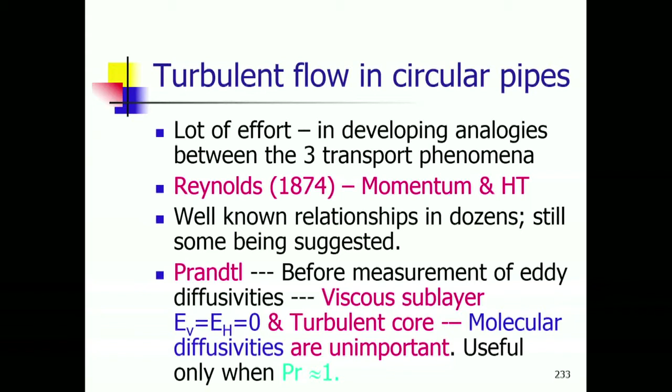In that viscous sublayer, Prandtl proposed that eddy transfer does not play a part, and he said EV and EH must both equal 0. And in the turbulent core, he proposed that the molecular transport is unimportant. It turns out this picture holds good when Prandtl number is close to 1, which means basically situations like gases. When the Prandtl number or Schmidt number becomes large, we will encounter difficulties. So, this is the first part that I wanted to tell you about.

Colburn, again a prominent chemical engineer, made a modification of Reynolds analogy which brought one of the surprises. His modification could explain data even when Prandtl number was large, and his equation appears this way. This is Stanton number, capital S, small t. Stanton number for heat transfer on average is the average heat transfer coefficient, H average, divided by Cp ux bar rho or Cp G, ux bar rho being the mass velocity.

And this is equal to 1 by 2 the Fanning friction factor F by Prandtl to the power 2 by 3. So, the Colburn analogy amounted to this: Stanton H average, which is nothing but the ratio of the Nusselt to the product of Reynolds and Prandtl, times Prandtl to the power 2 by 3, is H average by Cp G Prandtl to the power 2 by 3, equal to F by 2. And we know the Fanning friction factor is uniquely a function of Reynolds number, some function psi of Re; that entire graph of universal friction factor is represented by this relation.

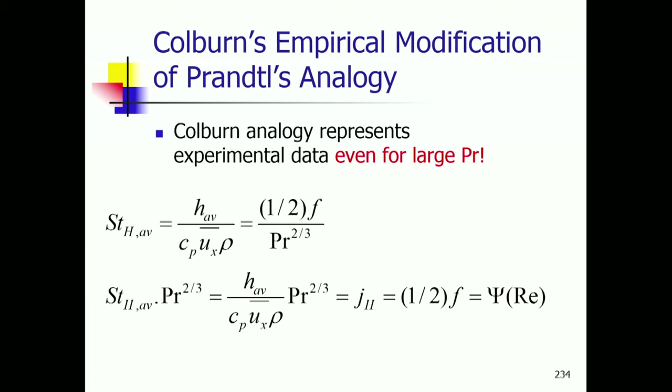Later, Chilton made further improvement. The Chilton-Colburn analogy brought in an analogy for mass transfer, and it appears like this. Analogous to Stanton H average, we have Stanton D average. Analogous to Prandtl, we have Schmidt to the power 2 by 3, and Stanton number is F average by C ux bar, where C is the concentration, moles per volume. This mass transfer group is called J sub D and is again equal to F by 2, the same function of Reynolds number psi of Re. This agrees with experimental data when Schmidt number is not too large.

We need obviously some correlations in order to be able to predict the Nusselt or Sherwood number from Stanton numbers. So, Stanton H average and Stanton D average for heat transfer and mass transfer, Stanton numbers are given by the same form as we expected earlier, but this is based on experimental data. Obviously, in the Stanton H we will have Prandtl, in Stanton D we will have Schmidt. It is not very difficult to remember, even though I do not expect you to remember this.

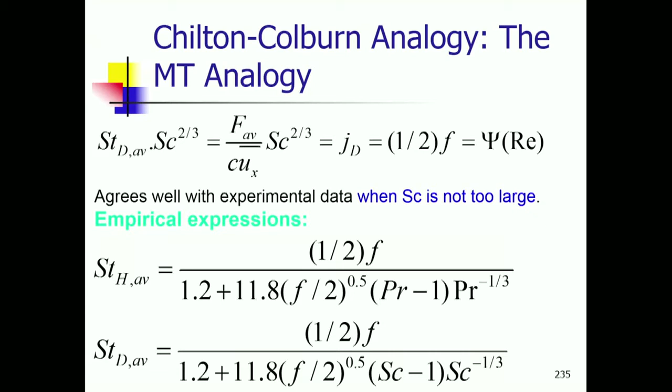F by 2 over 1.2 plus 11.8 (F by 2) to the power 0.5, and then Prandtl minus 1, Prandtl to the power minus 1 by 3; Schmidt minus 1, Schmidt to the power minus 1 by 3, rest is same. Okay. So, this pair of correlations works well in getting us the data on heat transfer and mass transfer. You are seeing the correlations, experimental correlations appearing in form of dimensionless groups or dimensionless numbers.

I had been talking about Buckingham pi theorem, we will come to that shortly. I have also been talking about representation of data in a compact fashion or in some kind of universal correlations, reduction in number of parameters and independent variables. Okay. I want you to have a glimpse of it once again today, but before that

let me now explain to you that we do not expect any analogy between heat, mass and momentum transfer, nothing to salvage, if the Schmidt number is large or Ed by D and Eh by alpha do not equal Ev by nu. Main point is when Schmidt number is large, very large, we do not expect analogies. It is another viewpoint.

I have come across later papers which question the very basis of analogies. Particularly important papers are from Churchill's group. We might have an opportunity to talk about those views later. But for the time being and at the graduate level, it is sufficient to note that analogies can be useful, but should not be treated as sacrosanct.

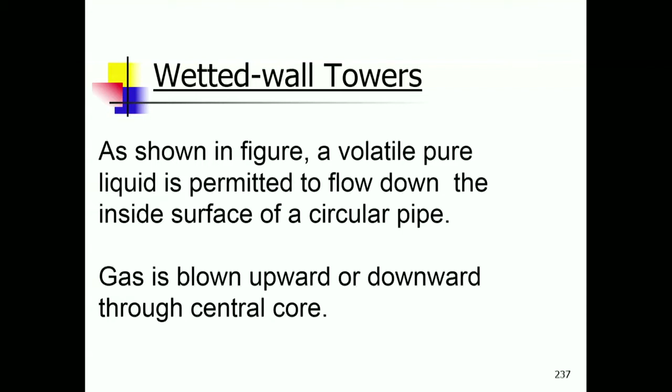Although I had described wetted wall towers to you in words very briefly, I will show you a sketch and it will give an idea how an experimental wetted wall tower would appear. Here is a pipe which is narrowed down here and renders liquid in this reservoir to flow down along the inside of this pipe. So, you have this as the test section. This portion is the feed reservoir, the liquid which is fed guided by this tapered portion on the inside of the pipe, and this is the length of test section.

The liquid film stays in contact with gas or vapor here and then gets collected here and removed. The gas is moving from bottom to top in counter current fashion here. Since we know the inner diameter of this pipe and we would be able to measure or estimate the liquid film thickness, we have a well defined gas liquid interfacial area in this test section.

So, if one were to measure the difference in the vapor concentration, highest here in the outgoing gas, and maybe 0 or whatever inlet concentration, and we know the gas flow rate, we would know the molar flow rate of the vapor which has been acquired by evaporation or vaporization across that interface of known area. Once we know the total molar flow rate of the vapor picked up divided by the area of this test section, we know the flux, and since we know the partial pressure which will be also the vapor pressure at the surface and the average pressure in the bulk, driving force would be known. So, the mass transfer coefficient could be estimated.

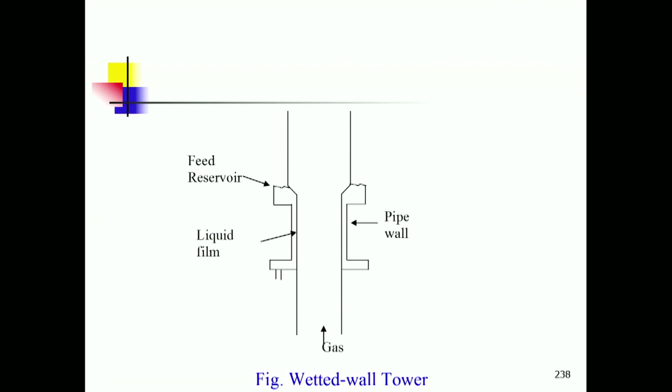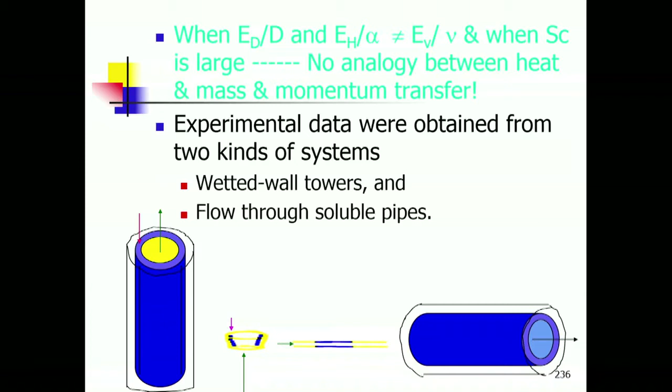By measuring the benzoic acid concentration in the outlet and subtracting the inlet concentration, you get the difference in concentration, multiplied by liquid flow rate, you get molar flow rate like earlier. Divide by the area of this test section and you get the mass transfer coefficient. The concentration difference here will be the solubility at the interface minus the mean concentration in the bulk. So, once again you can get mass transfer coefficient, and with this now you can change the viscosity of liquid, you can choose the solute to be of large molecular weight, so low solubility, etc.

And it was done by Linton and Sherwood, and the range of Schmidt numbers was extended from 0.6 to 2.5 of Sherwood and Gilliland to about 3000. Now, that is a large value. Their correlation appeared finally in this form. This is important for us to remember. Sherwood average is 0.023, Reynolds to the power 0.83, Schmidt to the power 1/3.

Okay. Take a few seconds to watch this correlation, and before I show you the next slide, I have something to tell you about fluid mechanics. So, Sherwood average is 0.023, Reynolds to the power 0.83, Schmidt to the power 1/3. If we were to correlate data only for gases, then the power on Schmidt would be better as 0.44. This probably happens because the ripples we had spoken about at the interface might influence the gas liquid mass transfer.

Okay, now comes my question. From whatever you have known of fluid mechanics so far, and considering that pipelines and flows through pipes are ubiquitous, we come across these everywhere, not just in a chemical plant or refineries, but in transport of crude and other petroleum products, which stretch over thousands of kilometers at times. It is natural to anticipate that a chemical engineer is crudely measured in his abilities in terms of his ability to calculate pressure drop.

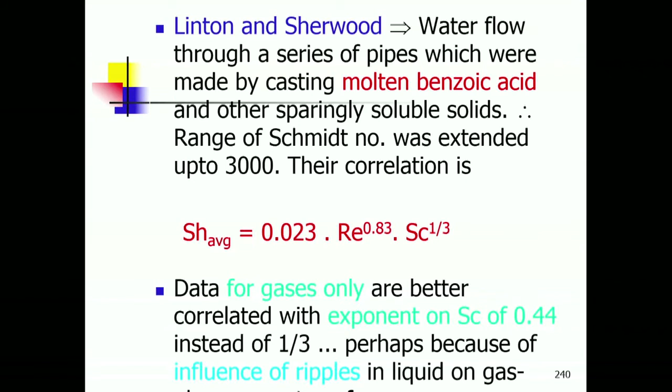Okay. Now, rewrite this as 0.023 Reynolds to the power minus 0.2 into Reynolds power 1.03. This is same as Reynolds to the power 0.83, and then we have Schmidt to the power 1/3 written as Schmidt by Schmidt to the power 2/3. Okay. Now, transpose these terms. Take this whole thing over here. So, it becomes Schmidt to the power 2/3 by Schmidt. This comes as Reynolds to the power 1.03. This is Sherwood average as we had.

What is left on this side then? Right hand side is 0.023 Re to the power minus 0.2. And that is what I want you to know is F/2, or F is 0.046 Reynolds to the power minus 0.2. Right? Now, observe the left hand side. You see this is Sherwood average by Re to the power 1.03 Schmidt. This is roughly Re. Sherwood average by Re Sc is the Stanton D. Okay. So, you see that Stanton D times Schmidt to the power 2/3, or JD, is equal to F/2 equal to 0.023 Reynolds to the power minus 0.2.

You see now confirmation that the analogies have more substance than what might appear theoretically. It is always a satisfying sight to be able to see experiments validating theory. It takes a lot of effort to develop reliable theories. When it happens, it's sheer joy. So, I hope I am giving you some glimpse here that mass transfer information is corroborating the information on momentum transfer. Two very differently originated correlations are consistent. Okay. This should place more faith in what we are trying to analyze.

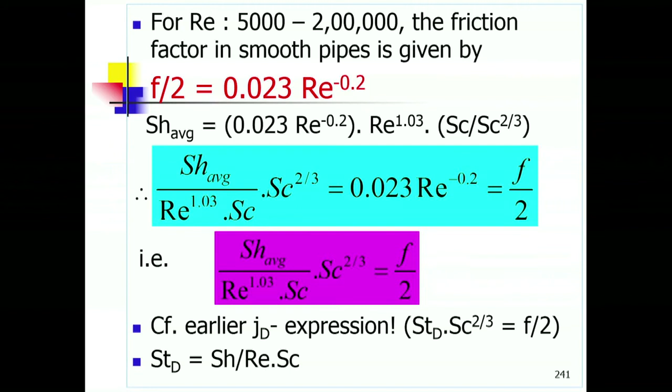We could write a heat transfer analog of this equation. Sherwood average as 0.023 Reynolds to the power 0.83 Schmidt to the power 1/3, which will be Nusselt average. This will have Prandtl to the power 1/3, and is satisfactory over a fairly broad range of 0.7 to 120. Remember, Prandtl number for water is just about 7. So, this is a fairly broad range of Prandtl numbers, and the analogous heat transfer correlation could be reasonably respectable.

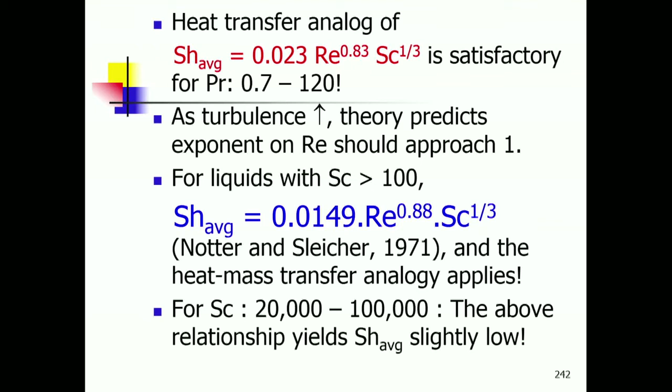The theory predicts as turbulence increases, the power on Reynolds number shifts to 1, and when Schmidt number is greater than 100, then the better correlation has been given by Notter and Sleicher. Sherwood average is 0.0149 Reynolds to the power 0.88 Schmidt to the power 1/3. If the Schmidt number is so high as to be in this range 20,000 to over 100,000, then the correlation gives you the Sherwood average slightly lower. So we may not have so much faith in extending the applicability of this equation to that high Schmidt numbers. 20,000, 100,000, these are the values of Schmidt numbers. They are too large for most correlations.

Now there are a few precautions we have to take while we apply what we have been talking about. Most of the experimental data are based on evaporating liquids or dissolving solids, and then they give you information about average mass transfer coefficient. Please note this. This is an important point which will be relevant for certain problem solving. The correlations that you have seen here, you have to regard them as giving you averaged mass transfer coefficient, not local mass transfer coefficient.

When average mass transfer coefficients and average fluxes are not the only information required, we have to be careful, because one, most of the data are in terms of these kind of transfer coefficients Kg, Kc, Kl for binary systems, Nb equal to 0, but without information on actual solute concentrations. Usually the solute concentrations are low, but we may not know those.

So when you have to use the information at these low levels of concentrations of solute, it is advisable that you first convert that information from these transfer coefficients into the generalized reduced mass transfer kind of data, F data, taking this PBM to PBT, taking the ratio of the log mean partial pressure of B to total pressure, or XBM, the so-called phase drift factors, as equal to 1.

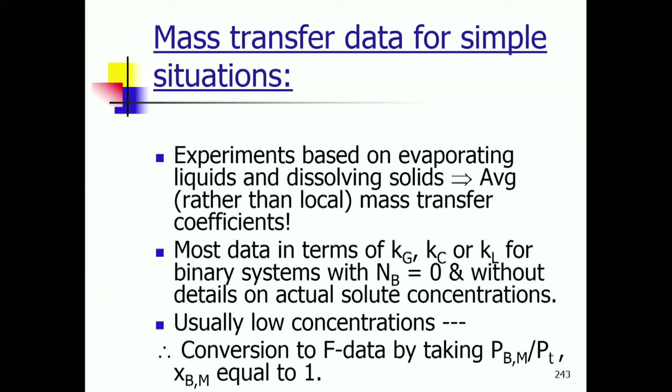So we translate the original information into F and then we use it at a different level of driving forces. That is what has been demonstrated in one of the solved problems in Treybal. I advise you to look at it.

Local mass transfer coefficients might vary from one location to another and in the direction of flow. Suppose we have an immersed object and the flow is taking place at not too small rates, which means we are not restricting ourselves to creeping flow, but moderate values of Reynolds number; we will see that the boundary layer separates.

If you take a spherical object, then the liquid which is flowing around this object will have the front half or the upstream half fairly closely followed by the liquid. The rear half or the downstream surface is where somewhere the boundary layer separates. Where the boundary layer separates, you have the vortices and eddies coming into picture, turbulence coming into picture, and we might have in the momentum transfer the form drag coming into picture. In the front half it is the skin friction.

In the rear half or the downstream surface, we will have skin friction as well as form drag, or the vortices and eddies contributing to friction. In cases like these, it is sometimes better to add the information corresponding to skin friction and form drag together.

So if you take, say, a laminar boundary layer and wake formation, and fluid is moving perpendicular to a cylinder, for instance, for Reynolds number up to about 25,000, Schmidt number up to about 2.6, we get a correlation of this sort: kG pT by GM, GM is the mass velocity, Schmidt to the power 0.56 equals 0.281 Reynolds to the power minus 0.4.

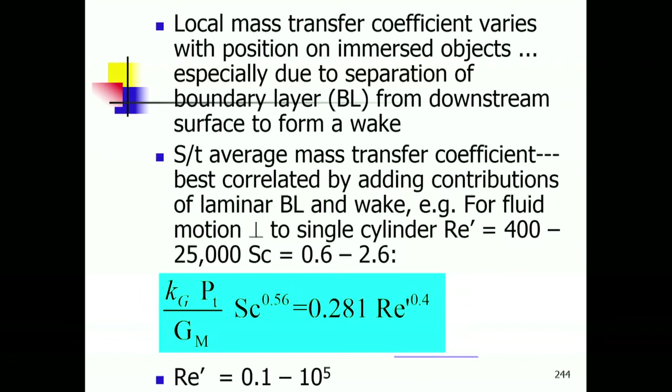When Reynolds number goes into about this range, 0.1 to 10 to the power 5, the corresponding heat transfer data for Prandtl number up to 1500, fairly large values of Prandtl numbers, Nusselt average comes out to be of this kind. Observe this and you would see what I am trying to tell you. This part, 0.15 Reynolds to the 0.58 Prandtl to the power 0.3, is similar to the correlations we have been talking about. The part here would come from the analogous skin friction part.

Now there is a long table in Treybal for a variety of experimental situations. One may have to choose a correlation from there. I want you to have a look at it, but remember nothing except this: F equal to 0.046 Reynolds to the power minus 0.2.

And then there is one correlation which I want you to remember, and about which I had partially spoken earlier, and we will have one problem based on that also. That is Sherwood number equal to 2 plus 0.6 Reynolds to the power half Schmidt to the power 1 by 3. I repeat, Sherwood average is 2 plus 0.6 Reynolds to the power half Schmidt to the power 1 by 3. This is known by two names.

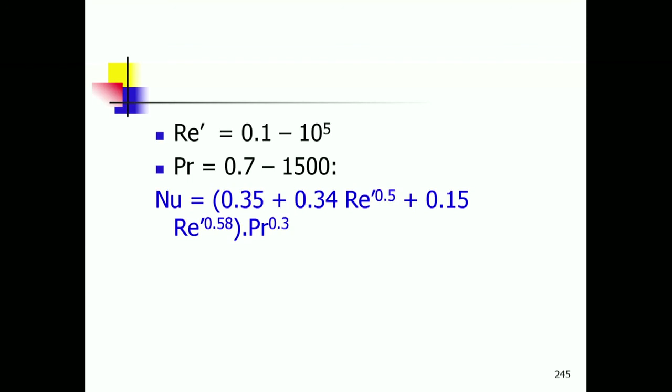See, the point is, in case the fluid is moving past the solid surface, it is bringing its own turbulent structure, whatever it is. I may have chosen velocity small enough, but if eddies are possible, they will be there, and they are coming and hitting this boundary layer. So your E_D by nu ratio comes into picture, which is absent when your fluid is stagnant. Couple this with a finer point, that convection, whenever present in any form, has a very magnified effect compared to diffusion. So even if a few eddies strike this boundary layer, it will show up in a much greater mass transfer coefficient.

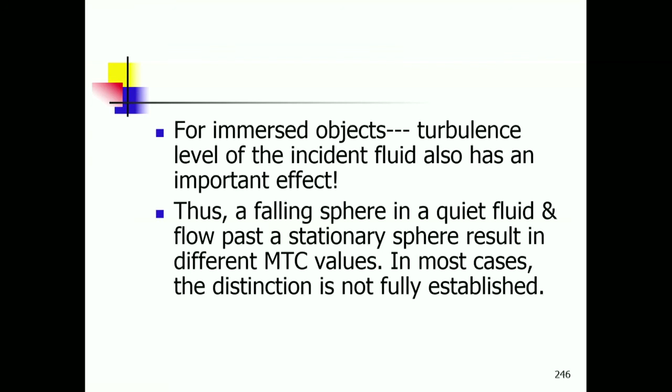Having said that, I am ending this lecture with a disclaimer that the distinction between these two situations is not entirely clear or established. So still people like some of you could study these basic concepts. Basic experiments could still be performed. We will stop here for today.